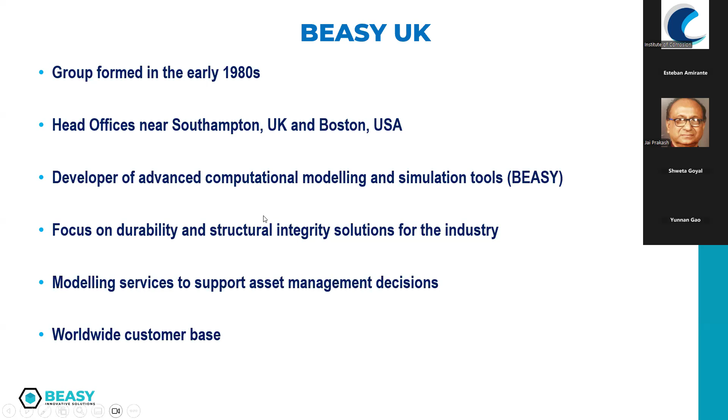So just as a brief introduction of BEASY, we started in the 1980s, so we celebrated 40 years within the market this year. Our head offices are in Southampton in the UK, and we have another office in Boston in the USA. What we do: we develop technology for modeling and simulation, cathodic protection systems, atmospheric corrosion and fracture mechanics. We are focused on durability and structural integrity solutions for the industry, and we can offer modeling and simulation services as well. Obviously we work with customers all around the world.

An introduction of our technology: it's a 3D boundary element solver, so it's not the finite elements. That numerical system was developed by BEASY 40 years ago. Just to mention that all of our developments are in-house, so we are not sharing our code with third companies. Everything is in-house and developed by our people in Southampton.

This boundary element system has many benefits because one of the big benefits is it uses less resources than finite elements, and it can be run on a normal laptop that perhaps you are currently using for this webinar. And it's a very accurate system as well.

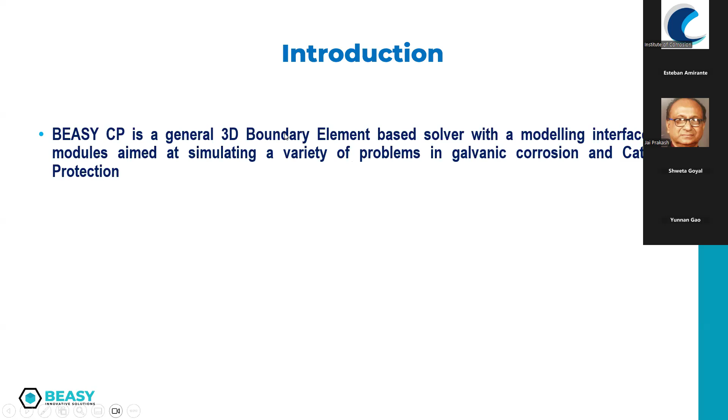And this is our numerical approach. This is just to say that we are not using handbook solutions or Excel spreadsheets. We are solving electrochemical formulas. Our integration domain is the electrolyte, and obviously our boundary conditions are polarization curves or polarization data.

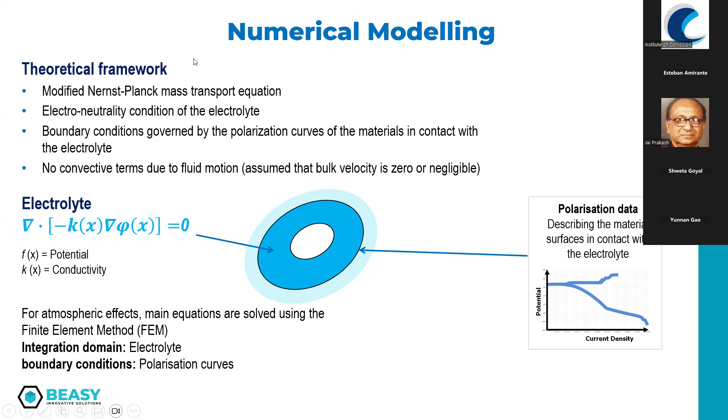So let's start talking about how to implement a digital twin for an offshore structure. First, we are in the digital era. We are creating a lot of data. Your telephones, your mobiles now are sending information to Google, to Amazon, to everywhere to prepare specific advertisement based on your behavior. Well, this is the same: we are creating a lot of data, and then we need to manage that data.

Let's say in the past, for instance, rubbish was taken into a lorry to a landfill. Today, rubbish has a lot of value because we can recycle many things from there: paper, wood, metals, plastic, and we can even generate energy from rubbish. So it has value. And corrosion data is the same. We used to do surveys, and that's all. Well, we developed technology and a tool that uses that survey data to add value to our digital twins.

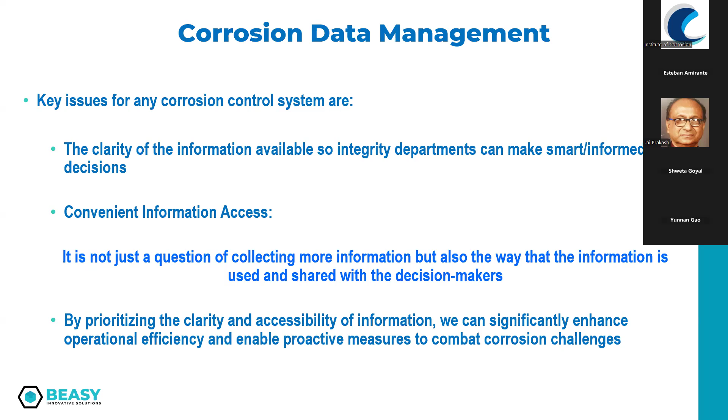Okay, so the problems we detected, because we started 10 years ago developing this service, this tool: first, data from inspection surveys are contained in different formats: PDF, Excel spreadsheets, Word, manual notes, pictures, videos, etc. Then the data collection is not consistent through time.

So today I am coming to this point to take a measurement. I am naming it point 1. Next year, I am coming to the same point. Another company is coming to the same point and is naming it point A. And in the third year, a third company is coming and naming it point Z. So Z, A, 1 is the same point, but sometimes it's not easy, mainly when we are dealing with jackets that have 1,500 anodes or 3,000 anodes. Well, it's not easy to understand those locations.

And then measurements are scarce because there is a budget limitation for a jacket. How many measurements will we do for a survey? 10,000, 1,000, 100? Well, it depends on the budget. So obviously there is a budget limitation, and sometimes those measurements are scarce.

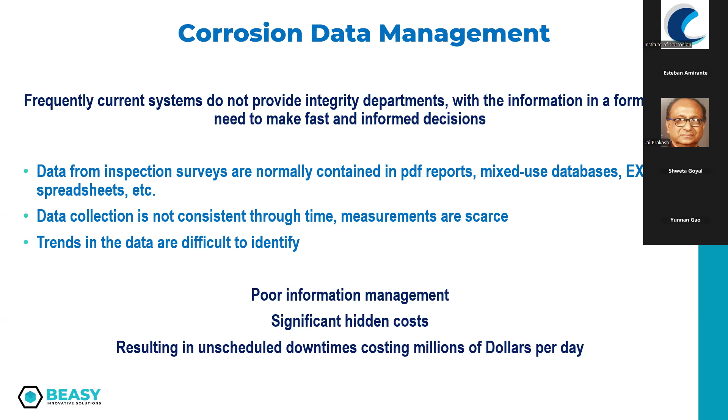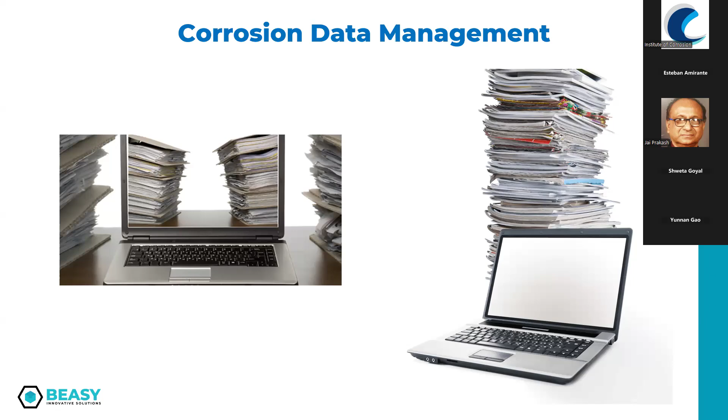There's another problem: sometimes a person in that company is trained to do that, then leaves the company, and someone else has to be trained, understand the way to do that, understand the way to digest all that info, etc. That's why companies are asking us to provide this as a service, so we are in control of the information and in control of digesting all that info.

So let's implement a digital twin. The first step is 3D digitalization. Basically, we take the structure from the design and we create a CAD file where we add the survey points and the visual inspection points.

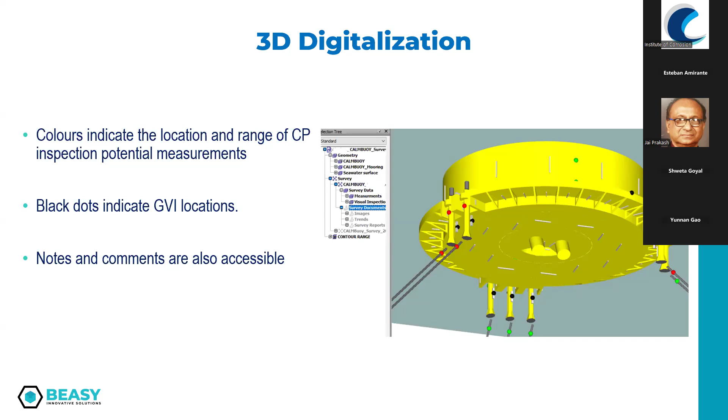The red points and the green points are the survey points, where a diver or a vessel comes to take a measurement, and the black dots are visual inspection points. So basically, the digitalization is just taking the design and converting that into a CAD file. Many companies are selling that as a digital twin, but for us, this is not a digital twin - this is an ordinary digitalization of your asset, something that even you can do.

We can see the entire asset, zoom in, zoom in, zoom in, double click on this survey point, and a window will pop up. We will see all the info stored for the last 10 surveys, perhaps 5 surveys. So all the info can be stored in every single point, and we can read that info. That point will have a name, so no one can come here and say this is point A, Z, or 1 - this point has a name, and all the info will be stored for every single point of the survey.

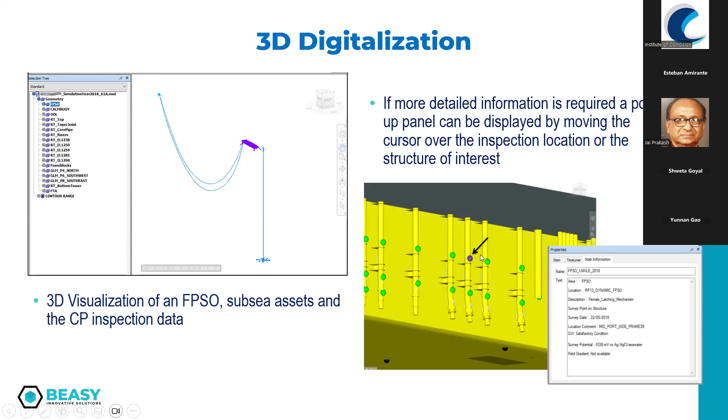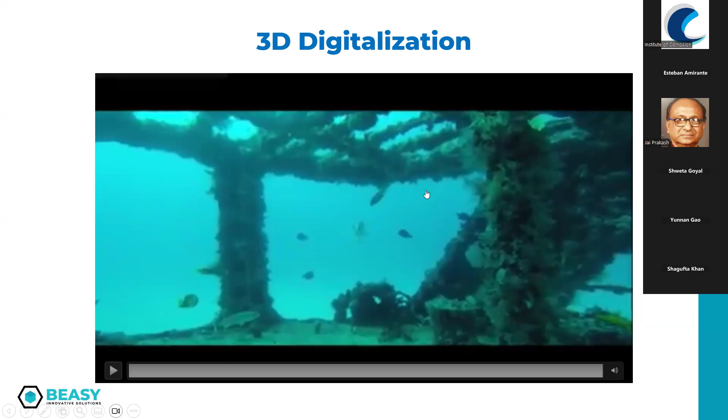Then we can store pictures, we can store videos. For instance, it's much better to have a video like this instead of a document saying everything is okay, or there are some damages in the structure. This is much better because the document needs our imagination to understand the state of the structure, but by having that, it's more friendly.

And the system will start to create some trends, so we can see what's going on in 2010, 12, 14, 16, 18, and how those potentials are moving. So we don't need to create any Excel, we don't need to create anything - we just need to load the info into the model, into the system, and the system will create that information. Obviously, we are saving a lot of time because creating that manually could take a lot of time.

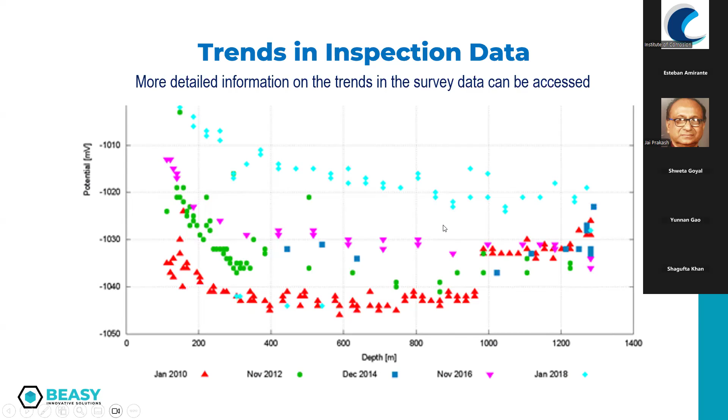This is the way we provide the info for the digitalization to companies - files that need minimum computer expertise to view, and they don't need to buy any license because those are license free. They can zoom in, zoom out, double click, etc. We are sharing this information with integrity departments, maintenance department, and finance department, and let's see why. But for the moment, this is the 3D digitalization - so we are in step 1.

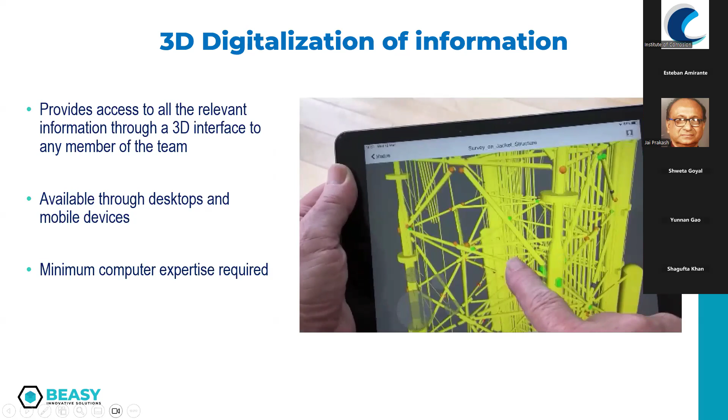So let's go to step 2, which is the digital twin. What is a digital twin? A digital twin is a tool that integrates survey data with a simulation model. So now we have two different things: survey data, inspection data, and a simulation model. Why are we using survey data? To calibrate the model and understand and even see the actual performance of my CP system.

If I have a 15-year-old jacket, pipeline, or whatever, and I need to understand how the CP system is performing, it's not easy. So we are doing a survey, but with the survey alone it's not enough to say everything is working well, all the regions are protected, or whatever. Then we can use the digital twin to predict the future performance of the CP system, which is very interesting because we can see problems in advance and mitigate those problems. We can detect discrepancies, and then we will see what is a discrepancy.

And then we can use the digital twin to run different scenarios. For instance, if I have a structure, let's say a jacket, and they are adding a pipeline next to my jacket, obviously there will be an impact from an interference between the two different CP systems.

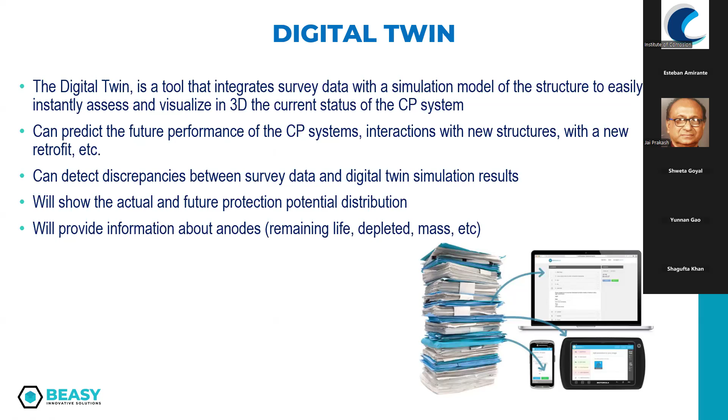So it's a very accurate picture of the CP system, okay, where everyone can see if all the regions are well protected or are within the expected range, etc. We are sending this information to maintenance, integrity, and finance departments. And then obviously we need to provide a prediction, because companies need to prepare budgets for the next year or for the next 3 years. So does the company need to allocate the budget for maintenance for that jacket? Well, it depends on the results of the prediction.

So let's say this is the prediction in 2 years' time. Are all the regions well protected or within the expected range? If yes, well, there is no budget to allocate for maintenance because everything is working fine. If there is any problem in any locations, well, you have 2 years to start preparing a mitigation plan or whatever you need to do with the jacket. You know that 2 years in advance, which is, to be honest, plenty of time to prepare everything.

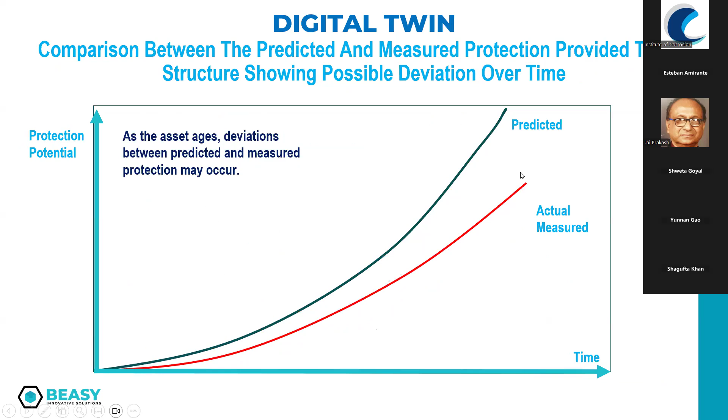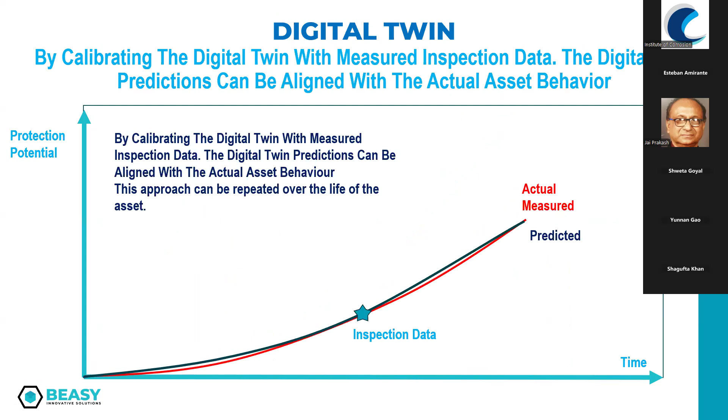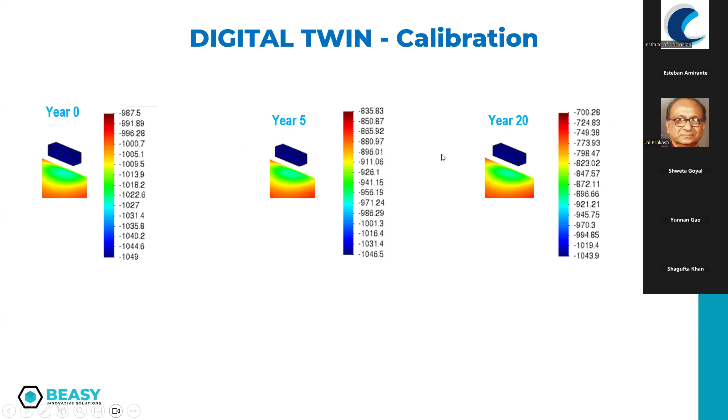And let's see why. For instance, I have a structure. I am taking a measurement here in year zero, minus 1018. It's okay. Year 5, minus 941. In year 20, minus 872. All those potentials are okay. So can I say my structure is protected? Obviously not, because survey data will be used to calibrate the model, but we need to create a model of the structure. If I see the model of this entire structure, I will see something like this. So the potentials here are okay, but in other locations they are not okay.

Obviously this is a very simple model, but that's why we need to model and simulate the entire structure, because we can detect, for instance, redundant anodes. We were working on a project of 3,000 anodes. We finished using 2,800. We saved 200 anodes, which is a lot of money, because they were redundant anodes. In other projects, perhaps we need to add some anodes because it's not reaching 30 years. But obviously, this will be seen with the simulation. So if we can see this, then we will have the entire picture of the CP system.

Because in the moment we calibrate the model, we are adding the context to the measurement. Because a potential, a measurement here, a potential here, it will give me not only the potential, it will give me the entire context of that measurement, because that potential responds to a polarization curve.

So what we are doing in this case, we are doing a reverse engineering. We developed this from a potential to recreate the polarization curve. So sometimes we have the polarization curve and we are taking some potential from there. In this case, we are doing that reverse engineering. We have that potential and we recreate the curve, which is very important in this case because that curve represents the reality in terms of pH, oxygen, temperature, seawater current, etc. All the parameters included in that scenario, they will be included in the polarization data.

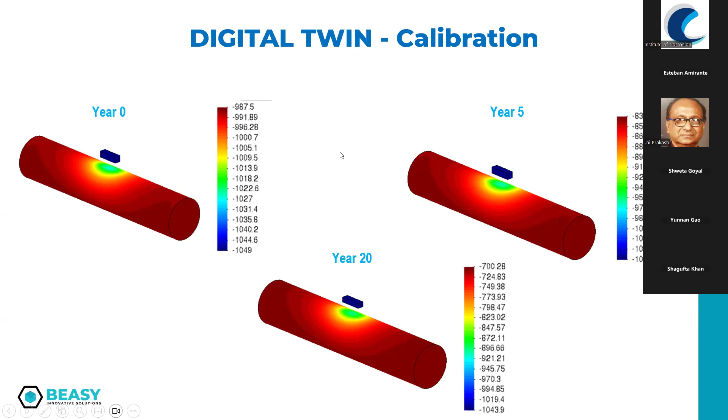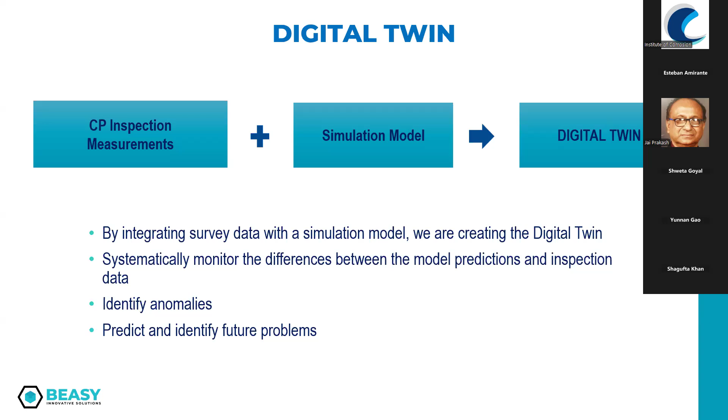Okay. Perhaps here is minus 800 and the simulation says minus 810. Well, there is not a big gap. Everything is in line. Here, the simulation says minus 800 and the measurement says minus 850 or 700, whatever. Well, there is a gap here. So this is a discrepancy. It's a gap between the simulation and the survey. We are detecting that with the digital twin.

So in the next maintenance plan, not in the next survey plan, in the next maintenance plans, you don't need to review the entire asset. What you need to review is just those locations with problems. There is an anode disconnection or an electrical disconnection. There is a damage on the coating because, you know, a ship hit it there.

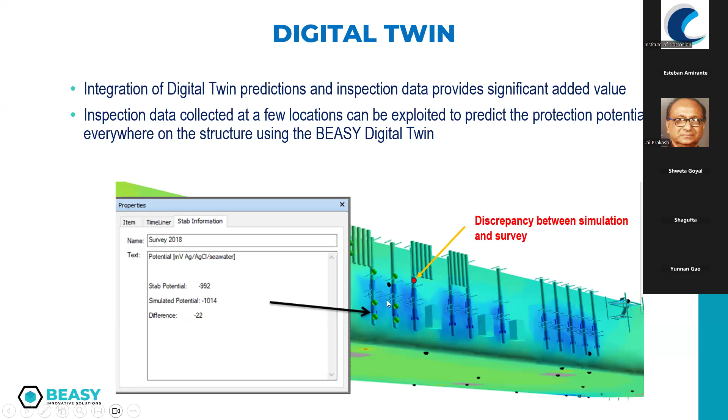So, yeah. So those are locations that need to be reviewed in the next maintenance plan. But obviously, you don't need to go everywhere. You have the locations that need to be reviewed in the next maintenance plan. So that's why I said we are adding value to inspection data, like the rubbish. So the rubbish has value. Well, the inspection data has value as well.

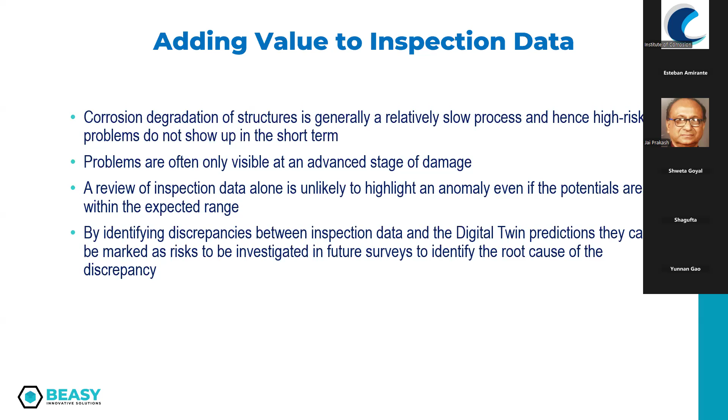Because when you see corrosion is slow, there are many corrosion problems all around the world with offshore structures, even if they have cathodic protection systems. And one of the explanations is that survey data is not enough to identify problems or even to identify problems in the future. So as I said, a review of inspection data alone is unlikely to highlight an anomaly. That's why we need to identify those discrepancies. And those discrepancies, they could be now, or perhaps we can identify those discrepancies in the future.

So obviously, if the company decision is, well, we will change in 1 year time, well, we can run that scenario and see how much corrosion is accumulated or how the potential will be distributed during that year to see if that is safe or not, if that is a critical part of the structure or not. So the digital twin can be used to run those scenarios, as I said before, and as I'm saying always, based on real data, based on a very good and accurate picture of the actual performance of the CP system.

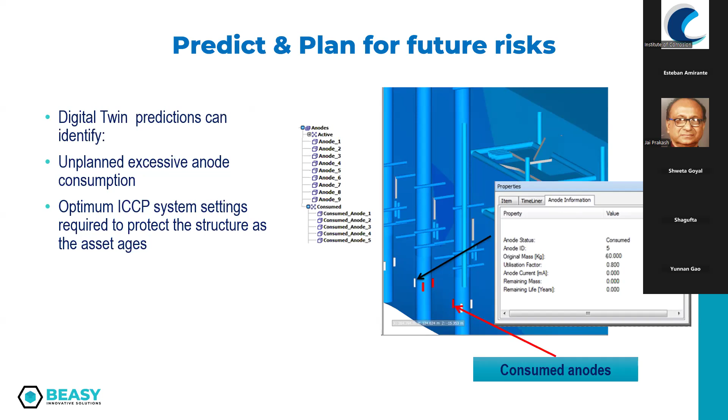So as I said, different scenarios can be simulated to investigate their potential impact on the integrity of the asset. So the digital twin can be run to see the future performance, to assess the addition of a new structure, could be yours or could be from another company. Obviously, that interference could be assessed, and then a mitigation plan can be assessed also to mitigate that problem.

Retrofits, or if you need to change a part of the structure, well, we can replace that part in the model and run a simulation. Whatever you need, it can be done with the digital twin, okay?

And obviously knowing when and where the structure will start to lose protection is particularly valuable, because if we need to extend the life of a structure, it's very important to understand when the structure will start to lose protection, because what we don't want is to lose those calcareous deposits that are helping the CP system to protect the structure, okay?

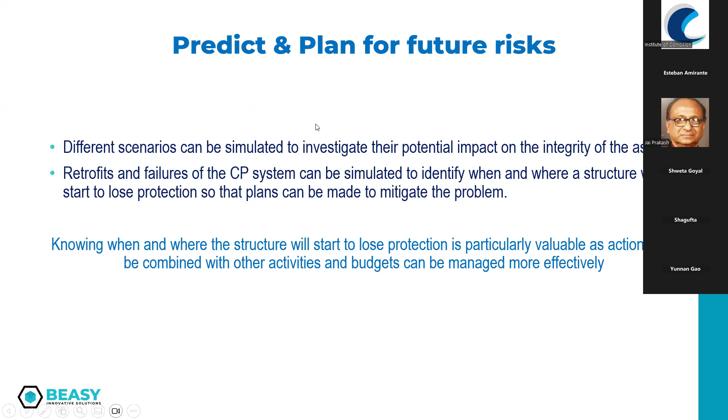If it's okay, well, nothing to do. If it's not powerful enough, perhaps in 2025 that hull needs to be sent for maintenance because it will start losing protection. But they know this in 2018, so they have enough time to prepare a maintenance plan, look for contractors, prepare a tender, allocate a budget, etc.

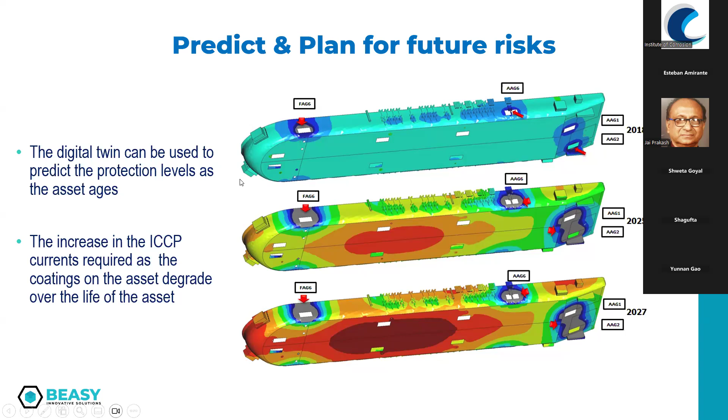And the same, we are working on some wind farm projects, because a wind farm is sometimes composed of 100 to 400 monopiles, and they have to do surveys. But a survey of 400 monopiles is very expensive. So they ask us to help them reduce that cost.

So as I said before, because we can extrapolate the results to the entire asset by having few measurements, what we are doing is taking the most representative monopiles, implementing a digital twin, and then extrapolating the results to the entire asset. And by doing that, we are saving a lot of time, money, resources, and we are helping companies manage those assets more efficiently than in the past.

Okay, so I am finishing my presentation with a summary. Digital twins provide any member of the integrity department, maintenance, and even finance access to all that relevant information to make decisions, and reduce costs and unscheduled downtimes. And a picture is worth 1,000 words, because seeing that picture of the actual performance and the future performance is more friendly than having thousands of documents on a desk and trying to understand if the CP system is protecting the structure properly or not.